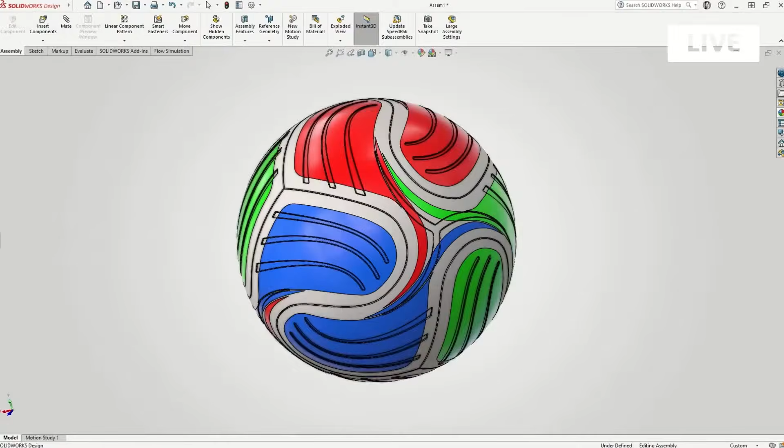So when we think about that question, from an engineering perspective, how much of the modern game is actually tied in terms of how it plays and feels to the ball itself? Yeah, it's actually a lot more than we initially thought, but it's not because of the brand new ball versus this modern day ball. It's what happens to the ball as you're playing it that affects it.

As we started to research what makes a good ball design, it came down to three main things: consistency of play, so you want to make sure the ball is holding air. In fact, modern day balls are tested with a 72-hour test, they pressurize it, and it can't lose more than 20% of that initial pressure over time. These older balls didn't hold air.

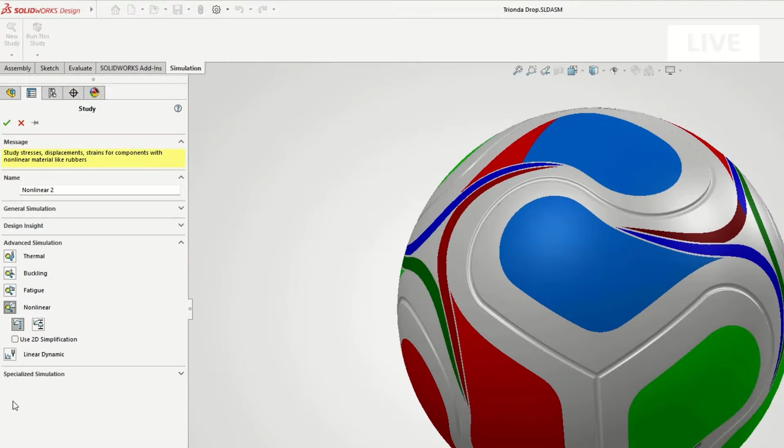As they evolved, they tried different ways, like vulcanized rubber bladders from Goodyear - Charles Goodyear was the inventor of vulcanized materials. They incorporated that, but it didn't work out great, didn't feel great. So then they went back to other stuff.

I gotta say, I love this kind of stuff though, because it's total fun fact territory. If you're going to a pregame or a watch party, these are like factoids you can share. Yeah, so make notes here.

The one I loved was they went back to a rubber bladder, but this is when we discovered that the biggest challenge in manufacturing a good soccer ball was moisture. And this is where in our studies we learned it makes a huge difference on a leather ball.

Like, how did you even - you mentioned maybe not going into it loaded with tons of questions and assumptions, and sometimes when you're doing design testing you do have a lot of assumptions you're looking to test, a lot of questions you're looking to optimize for. But what even led you down that path?

Yeah, just figuring out why did they historically change away from leather? There's a few factors in there, but the main one was the fact that leather absorbs moisture. And given it might not be a rainy day, how many times have you gone out to your yard or to the pitch to play and there's condensation and moisture out there naturally?

Yeah, it's not always just soaked from torrential downpours. Where does that water go? It goes into the ball. It soaks inside of this. And that's what we started to experiment with inside of simulation.

So virtually we were able to take one ball essentially - we had one material model set up for the synthetic panel, and then we were able to set up another one with a leather material. Different characteristics in terms of the modulus of elasticity, Poisson's ratio is a little different, density is different. Even though the masses of these balls are the same, that's never changed in the history of football, at least up to like the late 1800s.

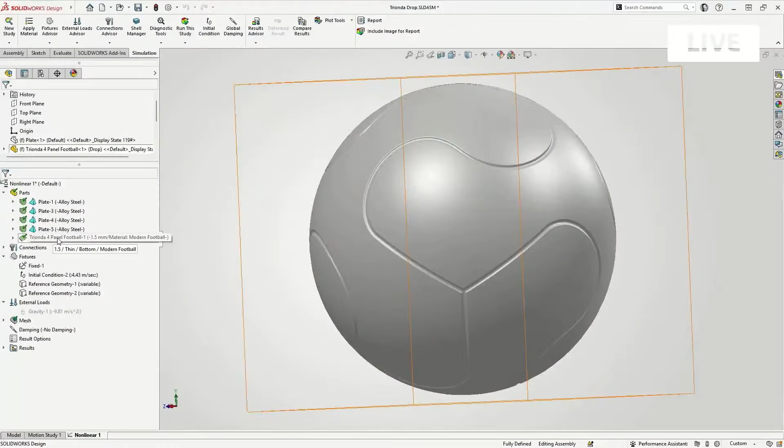We started off looking at it in SolidWorks simulation, just the desktop version. I think we do have a clip for that. So you guys were running, I think, like a nonlinear drop test. Yeah, we wanted to see exactly how much that water started to affect things. Drop test across multiple steps, right? Yep, there's a nonlinear aspect of it, but it's a drop test type study, and it was the easiest way for us to consistently say, let's just drop it from a given distance. We'll give it an initial velocity. We'll apply our custom material.

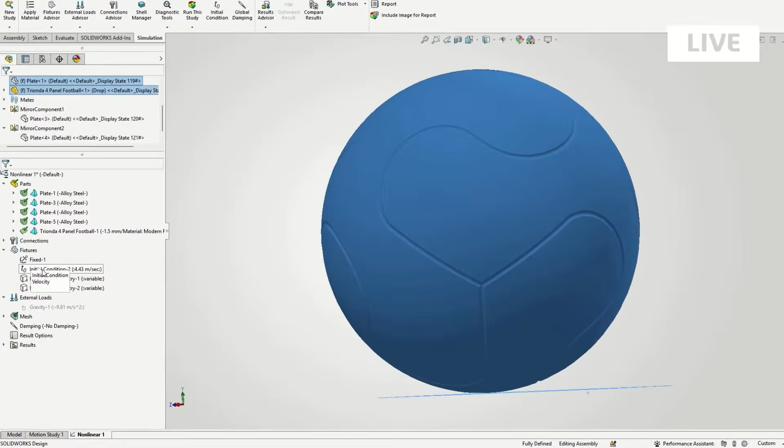In this case, we had the Trionda, which is a synthetic material. Once that was applied in the drop test analysis, this gave us a good benchmark to see what we're learning about, what we're investigating, what other questions we might have that we didn't know going in. We didn't have a lot of questions going into it, we just wanted to play around virtually with these balls to figure it out. Once we had the initial result done, they looked great. You always want to use your gut test: does this look like I expect?

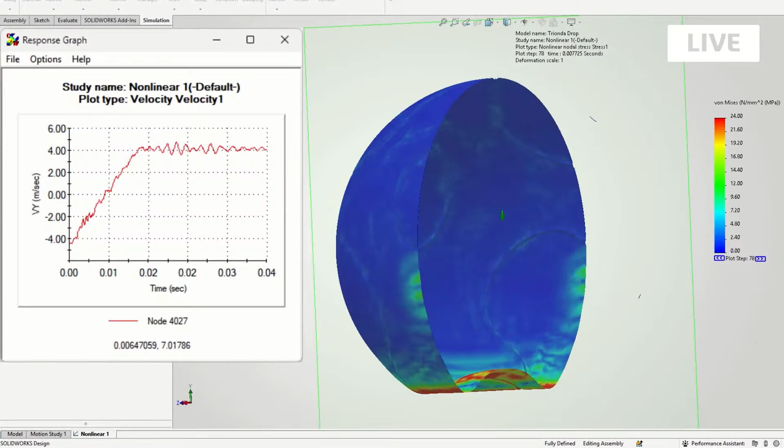And you're actually seeing a lot of the dissipation of the impact go through the wall of the ball. This is a great graph, showing the response velocity of that ball. In the synthetic ball, we had a great response to it, and it acted fairly rigid after that rebound happens.

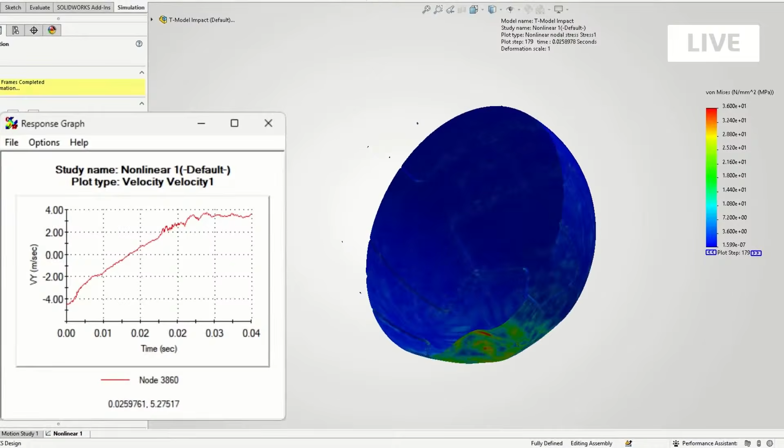When we changed out the material, and that's as simple as duplicating the study and swapping the material out, rerunning, we started to see this with the wet leather ball. That dramatically took away a lot of that response, and it dampened the kick. So you had to kick the ball harder to get the same reaction, or essentially the same kick, because we're consistent with the drop test. The same kick is not getting the same reaction of the ball.

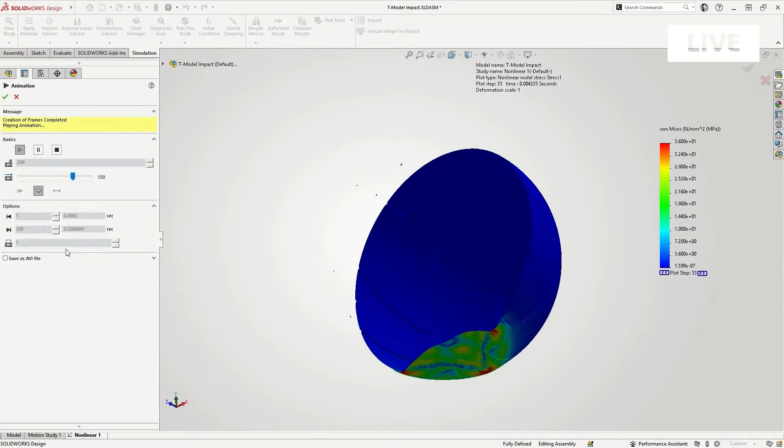You're not going to get the same velocity. It's going to be slower. On top of that, it's just going to be harder to play with and more fatiguing over time because it adds weight to it as well.

So inside of here, there were a couple things we looked at, like having internal pressure inside of the balls. We used shell elements in simulation to speed up the runtime, and the nonlinear drop test analysis here worked great.

But we had more questions, right? This started to open up a whole new area. Like, oh, we want to learn more. What about the flex? It's interesting. It's like you go into it with not so many questions, and you come out of it having many, many questions. Yeah, exactly, and we need to answer more and more.

And that's where we went to the 3D Experience platform. This is going to be an Abaqus-based solver, the top in the industry for nonlinear solving. We have one of the best solvers out there that does more of a full product verification. So what I mean by that is drop test to get that if-then: what is the difference if we change the material? But now we have an idea of what we're looking for, getting into this explicit dynamic nonlinear solver that's got cloud compute to it, so we can throw tons of hardware resources at it that's not even in the same building to solve these.

And this is where we lined up with an actual soccer cleat and started kicking these virtually to really get an idea, down to the fraction of a millisecond, what was happening with the impact as the foot came through and kicked the ball, to get some great comparisons. And yeah, it basically validated what we were expecting, that a wet leather ball just doesn't play very well, and that is a major issue. You need a consistent ball throughout gameplay.

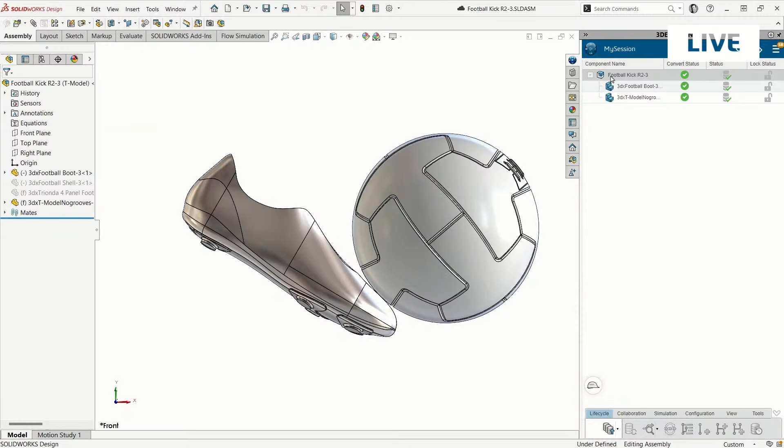I think going into it, I was surprised to learn that the initial ball was round, same size, same weight. The only thing changed was just the material, and that the material changed from leather to synthetic. That was the most surprising thing, that kicking this in a dry condition is going to feel the same as kicking a brand new synthetic ball. We'll learn that spinning it is different, right, so just a normal kick impact to it.

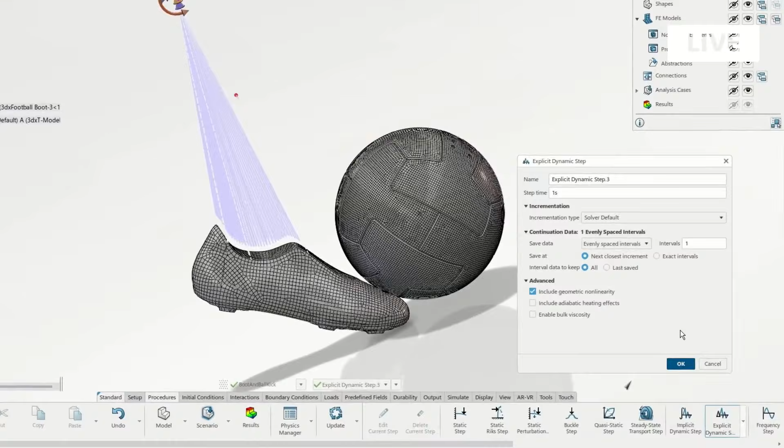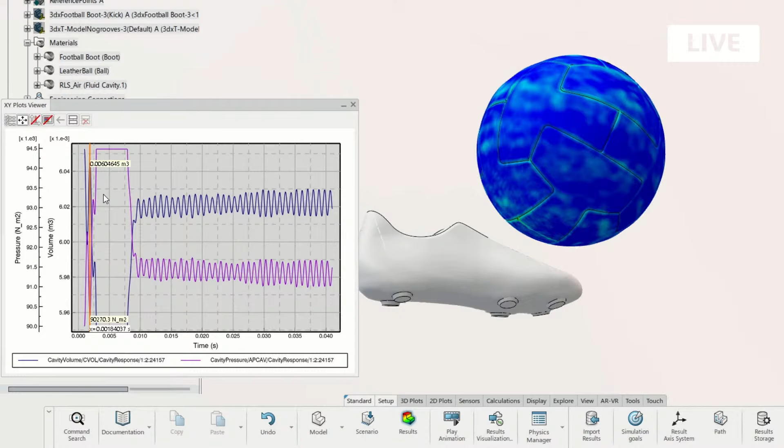And then we're actually showing, here's the explicit dynamic solver that we did right on the cloud. So this is using cloud compute. We had a soccer cleat here that we were just kicking the ball with, and you can actually look at the response of the kick, you're getting this vibration. It's actually the natural harmonic of the ball that's occurring as it goes out, and that will change as well depending on wet versus dry. And you can actually see the imprint of the cleat itself on the bottom view there. It's super cool, that's super detailed results.

Yeah, it was really fun to get it up onto the Abaqus solvers and start to analyze down to a tiny fraction of a second to see what was happening with the ball, which is just super geeky and fun to do. That's very cool.

Before we go on, we talked about how a big focus of this conversation, as you guys have learned, is really the ground game through the history of football. We're going to get into some of the airborne elements of football. I wanted to ask, if simulation can have such an impact on something as seemingly simple and spherical as a football, how does that extend out to different pockets of industry and the applicability there?

Yeah, obviously back in the 1900s they didn't have Abaqus solvers on cloud compute to help solve a lot of these challenges. So the iterative process to get from that initial leather ball to today's modern ball took a long time because it was physically building a ball, testing the ball, iterating through feedback and those cycles. And today we still do that. A lot of companies that don't incorporate simulation, or do it very little in their product development, still go to a physical prototype, which you always want to do.

So it's actually magic, it is magic what's happening, but magic has different terms. Sometimes magic is called physics, sometimes magic is called chemistry, right? So what's actually happening, guys, when you kick the ball and it's curving through a medium, in this case the air, you've got the ball spinning and you've got the air hitting on one direction. So you've got one side of the football that's accelerating the air, and the other side where it's decelerating the air because it's going against the flow of the wind.

So what's happening with the side that's accelerating, we're creating a low pressure system over there, and on the opposite side is a high pressure system. Of course, this is Bernoulli's principle 101. So with this pressure difference, what happens is there's a lateral force that gets applied to the off axis of the football, and that's what's actually dictating where the ball is going. So magically, actually, it's air that's physically pushing the ball based on how the spin is happening.

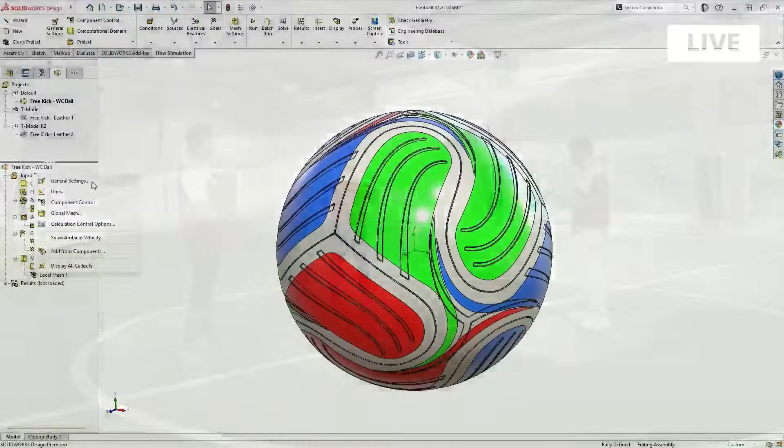So 3 things to keep in mind over here: the spin, of course the Magnus effect, and of course the velocity that you kick it from. These are the variables, guys, that we actually input into SOLIDWORKS Flow Simulation, and it quantifies what you feel as a player on the simulation, so you can validate these things. To be honest, as a player, these are invaluable information to me to become a better player. How do I want to curve? Where should I aim the ball to curve a little bit more? Things like that.

You guys are saying in terms of different lines to remember, it's like low pressure, high velocity, high pressure, low velocity. That's Bernoulli's principle, and it's literally one of the first things we start learning about when it comes to airflow. The Magnus effect comes down to the rotation, right? Because Bernoulli's principle is also the driving principle behind the airflow of a wing, how does an airplane fly? But where the Magnus effect comes in is that we get that same principle based on rotation.

One thing that surprised me overall as I started to digest some of the study results you guys obtained through this project is that older balls used to perform less predictably in flight. And we spent a lot of time just a moment ago talking about how the ball is a ball, it's a sphere, so you might look at that and think how different could it be? If it did behave less predictably in flight, why would that possibly be? What was going on with these older balls?

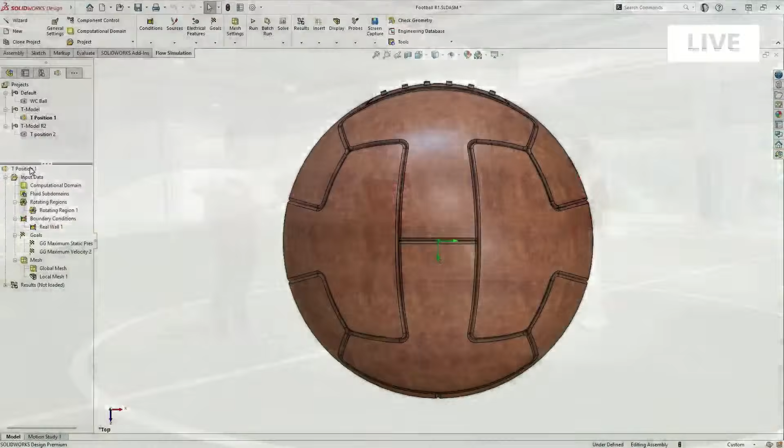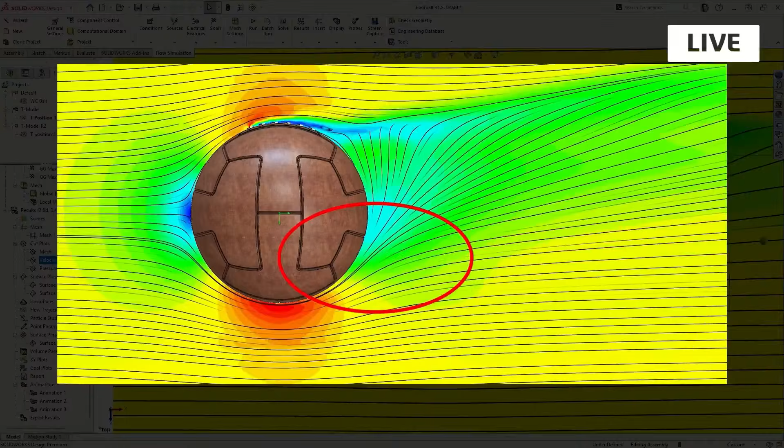Yeah, I can start on this one, take away: Ron had set up the studies. Basically, rotating mesh was how we set up that rotation region. Once we got it in there, we did it for all the balls. We had the 2 balls, this one here, the old ball and the new ball, refined really nice mesh around all of the little grooves and anything that could affect the flow path. And on the old ball right here, you'll see we actually get this vortex shedding, so vortex shedding was happening based on the laces.

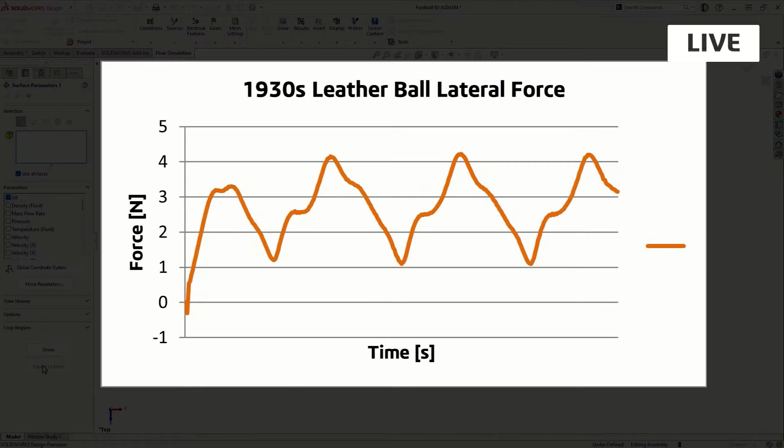So if you have a tangential direction of that lace swinging around during rotation, that was causing a massive distribution change or fluctuation in pressure. That lateral force is what we're looking at here, not the pressure, but the lateral force based on the pressure differential, causing it to be less consistent versus the standard ball. Having these laces on the edge as it's rotating was interrupting the flow enough to dramatically change that lateral force, whereas since we don't have laces now, it's a much smoother surface.

There's still texture to it, there's still grooves in this ball, but they're consistent all the way around. So you're gonna get much more consistent lateral force and a much more consistent arc with the newer ball design.

Oh yeah, 100%, Mike covers it. One thing to notice on the old ball, along with the laces, it's a very inconsistent ball. It's not very spherical, like Mike mentioned previously, where if it gets wet, it gets heavy. So it's a very inconsistent ball, and when you have an inconsistent ball, you can't reliably predict the flight path or control it enough to hit it in the top corner. So it becomes incredibly hard. Whereas the newer balls have a more predictable surface, because the non-uniform surface on that old ball creates a very erratic, turbulent boundary layer on the surface, which makes it hard for us to predict. On the new ones, it's a lot more predictable.

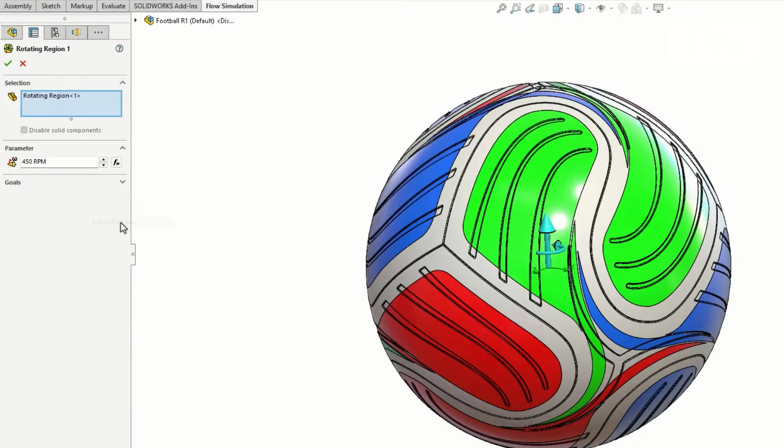This is a very funny question, Sean, and I love it, because being in simulation and in sports, I see the world differently. I see streamlines, and if I'm catching a plane, I'm seeing streamlines over the wing. I'm seeing colors, guys. So even when we were working on this project, we started with the very initial pressure drops.

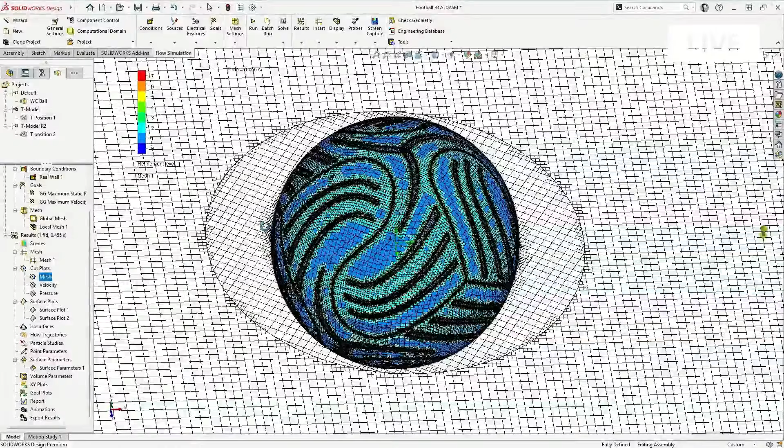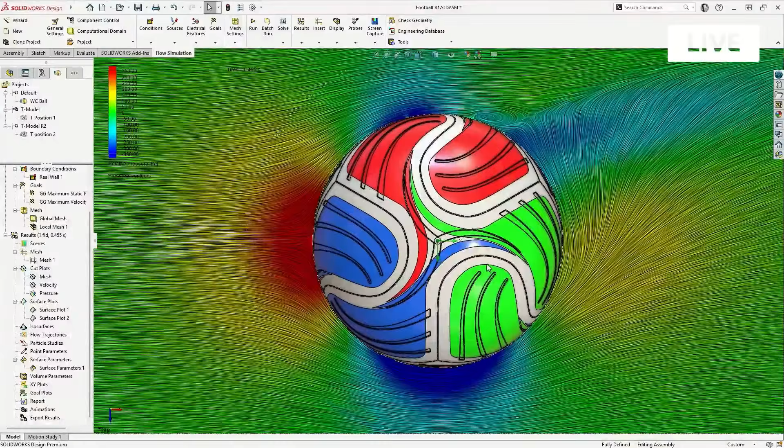You've got spectators and players playing. They can see the ball move and rotate and spin and knuckle, but they don't really see what's happening with the air around it. Now I can visualize streamlines and vortices and wakes that trail behind the ball like a comet, in different color gradients and orientations. So now when I'm kicking the ball, I'm thinking, ooh, there's a streamline going that way.

There are many results you can get from running a flow simulation on a product, like stagnation points. It's good to see where the air hits the front of the football, where there's basically no velocity of air, and you also see the spin, the shifting of the axis, and the Magnus effect. I can talk about this all day. We can quantify all that too, so you see it and get an understanding. Visualizing it helps, because you can't really make something better unless you can see why it's not a good product in the first place. The visualization aspect is great, but so is the quantification side.

We looked at surface parameters on that ball and were able to actually look at the tangential force equating on one versus another, to see why one ball is going to hook a lot harder than the other, just based on the geometry of the laces and what that would cause to the airflow as it's rotating. So to answer your question, Sean, it was like, holy cow, any minor detail that's not symmetric is going to make a major impact on the play of the ball.

I thought that was really awesome. It's funny, being in simulation for all these years, to understand how we can view things differently and make our products do a lot better. Without these tools, without flow simulation and the variables we input, it would be really hard to make a product that's quite good, or it would take a lot of time and a lot of prototypes.

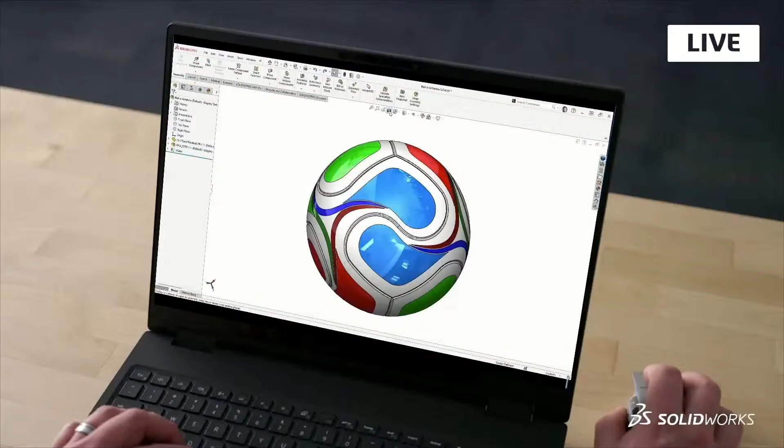And now for offside calls, we have a smart match ball - that means we have sensors and electronics embedded inside the soccer ball. There's an inertial measurement unit in there that measures the acceleration and spin anytime the ball is even slightly touched or bumped, and that lets us figure out exactly when the ball was touched for offside decisions. So today it's really a combination: high-speed camera systems for goal line decisions, and the smart ball to help with offside decisions.

Okay, so to intersperse a bit of soccer history here, how did we get here? When did it become apparent that reliance on referees and replay simply wouldn't always cut it?

I think it was really the accumulation of controversial moments over the decades. Soccer's always had these big 'was it a goal or not' moments, and because the sport is so low scoring, one bad call can change the outcome of a game or even an entire tournament. Replay helped, but replay still depends on camera angles, visibility, frame rate, etc.

There can still be some ambiguity, bad angles, and essentially an inability to make a decisive call with video. And I think that's why sport in general is moving towards more objective measurement systems rather than subjective calls. That's really what's driving all of this—rather than make a subjective decision about what we think happened, we can measure the data and decisively say what really happened.

Okay, so let's get into the modern in-ball technology today, Peter. How fast is the ball tracking data actually being captured during a match? Well, that's a great question, Sean. And to answer it, really fast. Modern inertial measurement units, or IMUs, inside the balls can operate at up to 500 hertz. That's 500 times a second that data is being captured.

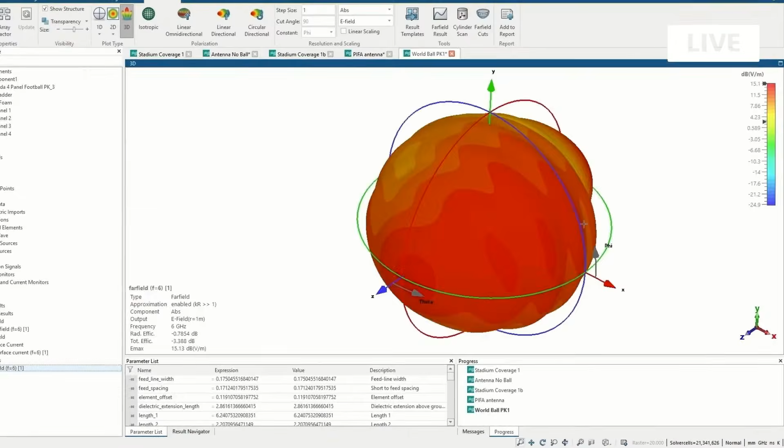Now, why do you have to measure the ball's acceleration data that frequently? Well, the higher the frequency you get, the more often you sample that data, the more resolution you get, and the more accurately you can answer the question: when exactly was that ball touched? So the faster the measurements, the more resolution. That's basically it, and it's done 500 times a second.

But it's not just the speed of the measurement. That has to then be transmitted from the ball to a receiver, and from the receivers to the officials that are actually going to make the call. So it's not just the high speed, it's also having very low latency communication as well.

You know, one thing I think most people never consider is that in a packed stadium, you've got tens of thousands of phones, wireless devices, cameras—just signals everywhere. So how difficult is it to maintain reliable communication and tracking accuracy in an environment like that?

Stadiums on game day are electromagnetic chaos. You've got tens of thousands of phones, Wi-Fi devices, Bluetooth devices, production and broadcast equipment, etc. It makes it a really, really messy RF environment. And then you have the stadium itself—all of that concrete and steel causes reflections and what we call multipath effects, where signals can bounce around and interfere with each other. And that's why simulation is so crucially important here.

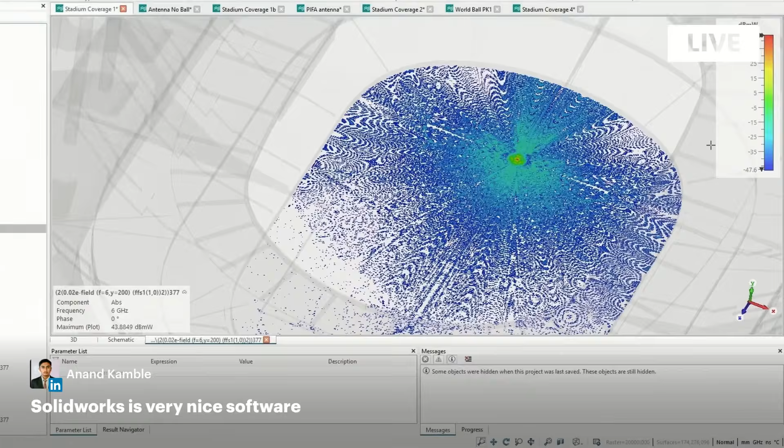We can take all of these things into account. We can, to start with, take the ball and measure how the ball's material actually affects the antenna signal. Then we can look at the entire stadium—how that signal propagates through the stadium, look at reflections and dead spots, even test orientation of the ball, and ensure the reliability of the communication in a realistic environment.

Okay, so from your perspective, what impresses you most about the fact that these systems actually tend to work consistently in real time under live match conditions? That's a tough question because there's a lot of things that impress me about this system. But if I had to narrow it down, I would say probably the combination of miniaturization and ruggedness of this system. I mean, it's a pretty impressive feat to be able to take a sensor, battery, and antenna package and shrink it down into something small enough and light enough to be put inside a soccer ball and be used in gameplay.

But it's a whole other thing to then have that be kicked around by elite athletes for its entire service life. Think about the impact of one of these pro soccer players kicking a ball that's going to launch it at over 100 kilometers an hour, and then think that happens over and over and over again. This system still has to accurately capture all of that data 500 times a second and transmit it out to a receiver. So the fact it can be that small and take that much abuse, I think, is really, really impressive.

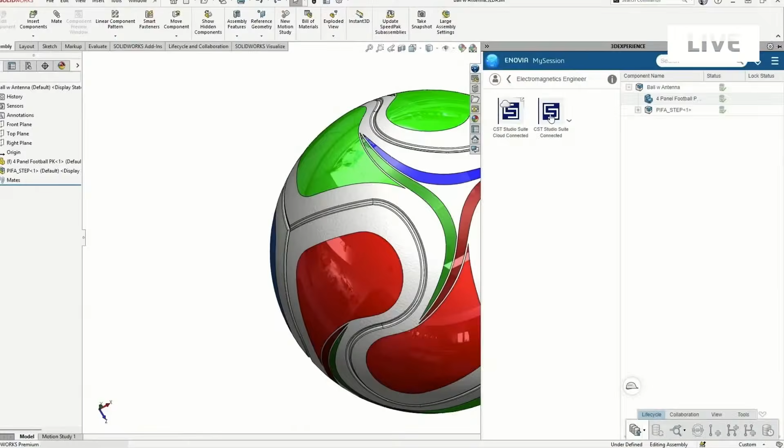So how did you model a simulation of lifelike game and stadium conditions, and overall, what surprised you about the results you saw? Well, that was the most interesting part of this project, and also most of the work—moving past the antenna itself and looking at its installed performance in its environment. And the reason for this is antennas are tricky.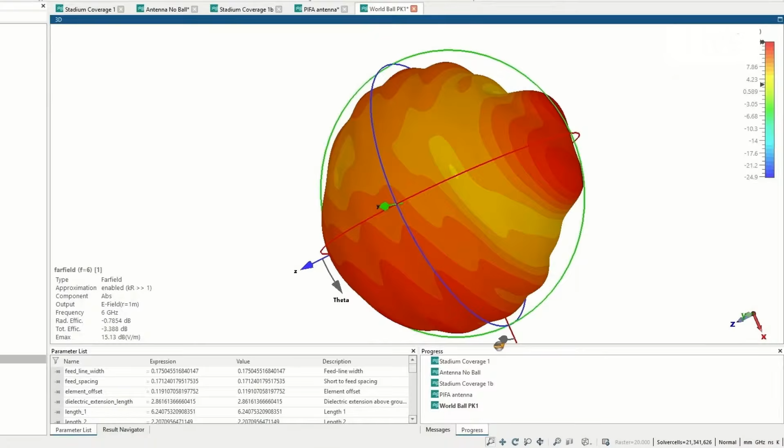You can design a beautifully performing, excellent antenna that works in free space and tests very well in a lab. But as soon as you put that next to anything—if you mount it in a soccer ball or on a car, or literally put it close to anything else—its performance will drastically change. And that's what we need to consider here. So it starts with accurate geometry. We actually modeled the entire ball in SOLIDWORKS, including the rubber bladder, the pocket for the antenna, and the antenna itself.

And we were able to look at, once we have the desired antenna performance, how that's affected by those ball materials that are put around it. By accurately capturing the close environment to the antenna, we can actually accurately capture its performance.

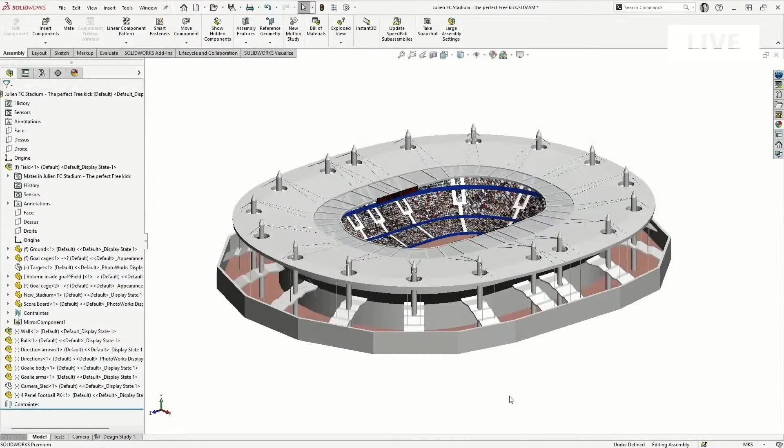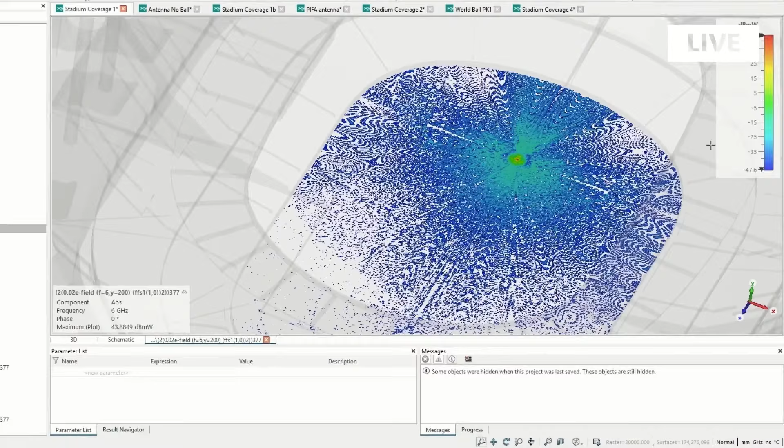And then by moving beyond that, we look at the stadium itself. Using a SOLIDWORKS model of an entire stadium and applying accurate electromagnetic material properties, we can look at how that signal propagates out from the antenna through the ball and into the stadium, how it bounces off certain features, where it reflects, where you get dead spots. Some orientations of the ball will have stronger signal than other orientations.

So it's being able to capture all of that. It comes down to understanding what that environment is and trying to get your simulation to reflect it as closely as possible. Okay, so beyond football, how are these electromagnetic simulation tools being used to test realistic conditions and solve everyday problems in the rest of the real world?

I think that's a really powerful takeaway from this whole project. People may see a soccer ball and an antenna and think this is some niche sports technology story, but it's really not. The same principles here, having an electronic system installed inside a real world product, happens every day, all the time in the world around us.

And let's look at automobiles. In an automobile, you have Bluetooth, GPS, cellular, keyless entry, autonomous driving systems, etc. Aircraft have complex radar and communication systems and electronics. Medical devices are driven by electronics and wireless communication, and even household appliances are becoming connected smart devices now.

The challenge that product designers and engineers face today is the same across just about every product category. How do you predict the performance of an antenna installed in a real product operating in messy real world operating conditions? And that's not limited to soccer, that is literally every industry out there right now.